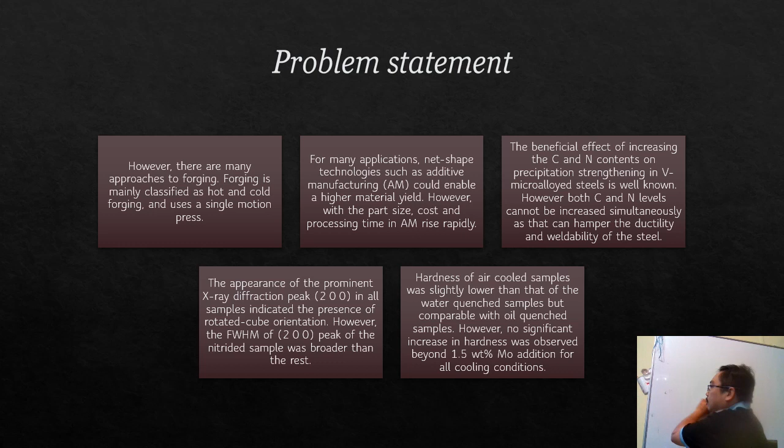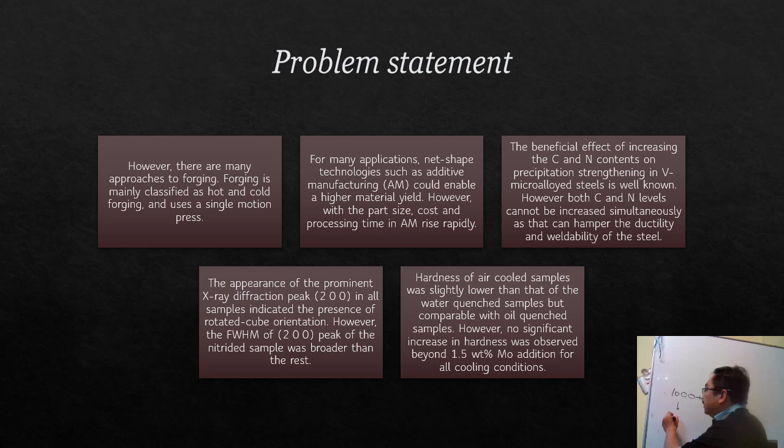Among the problems, people can study this approach to forging. Forging around 1,000 ton press. In normal operation for other countries that don't have this 80,000 ton machine, you can do forging. Forging also can reach nearly 1,000 ton press, 8,000 ton press is within the range of forging machine.

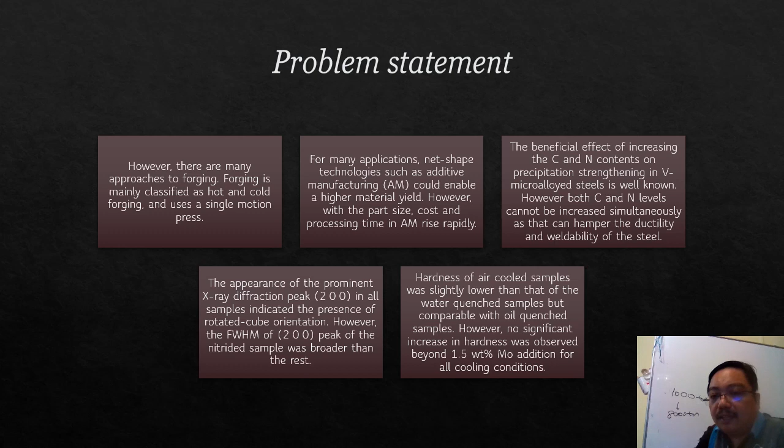Maybe some research want to, because the advantages: if you have a machine that can press very powerfully, very high level pressing, you can press any kind of material. So your material can become strong. Okay, this is the advantages. Okay.

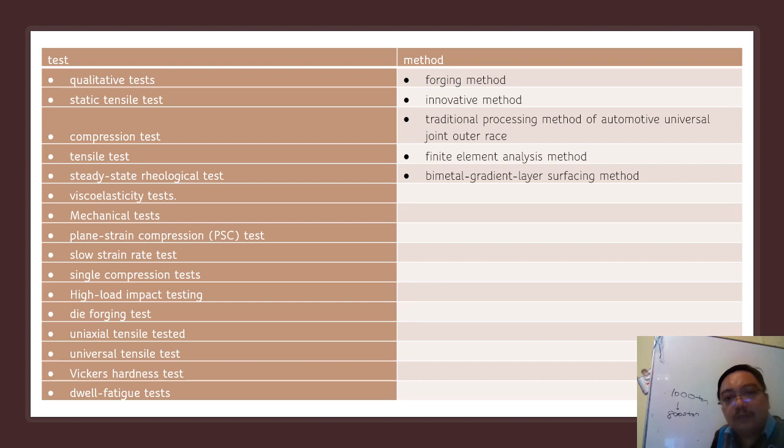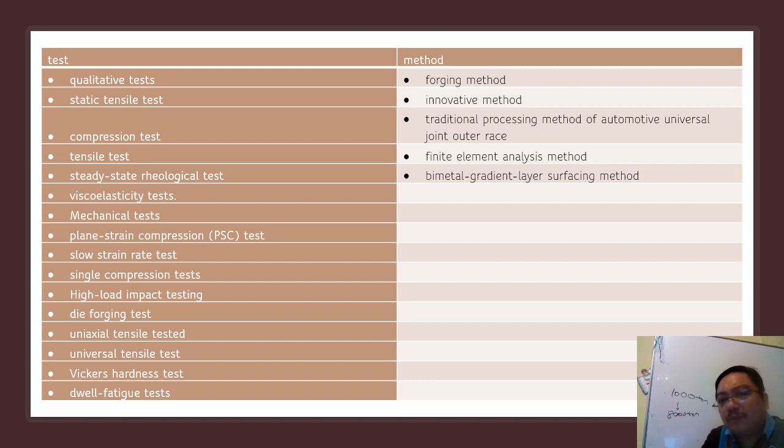So this is the research methodology. Okay, if you are interested in doing this research, this is among the tests that you may encounter, you may use. Maybe you will not use some of them, but most of them you may use. Discuss with your supervisor. Okay, they are the qualitative test, compression test, viscoelasticity test, mechanical test, forging test, uniaxial tensile test. This is a method, forging method, innovative method, traditional processing.

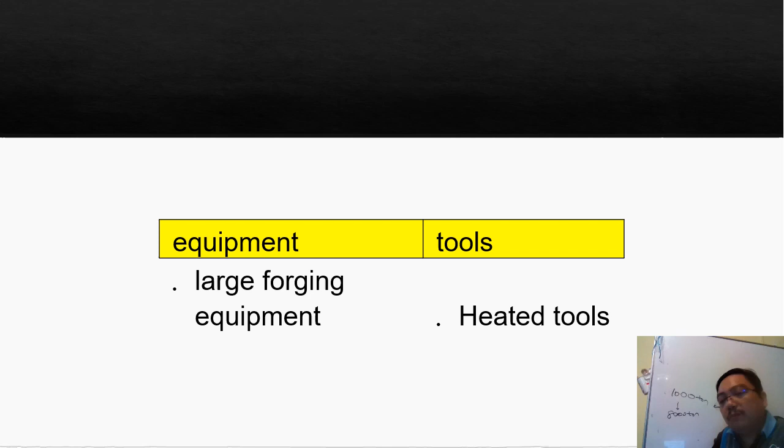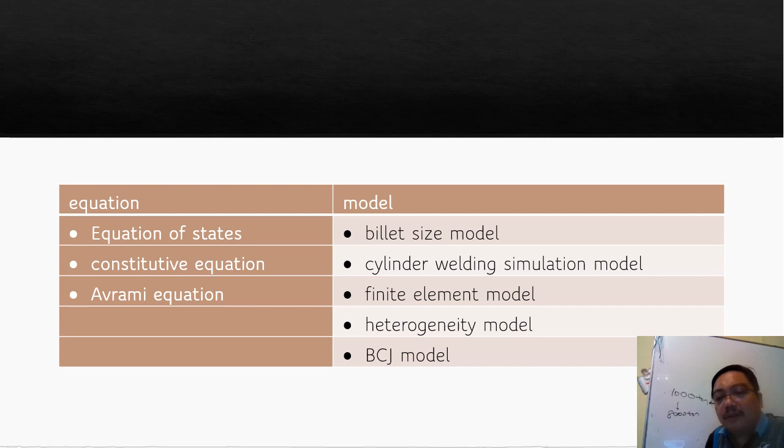equation of states, constitutive equation, Avrami equation, billet model, simulation model, finite element model, heterogeneity model, BCJ model. When you want to seriously go into this research, you must learn. You must learn by yourself what this equation, Avrami, billet model, and everything is. It will help you a lot. Okay, this is the properties that you may use, most of them.

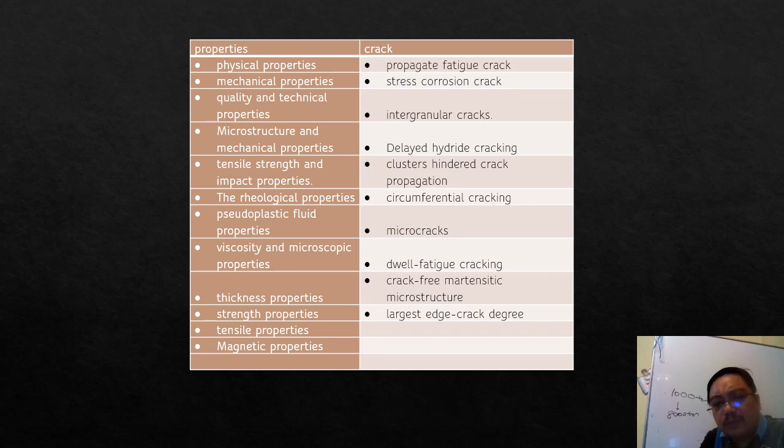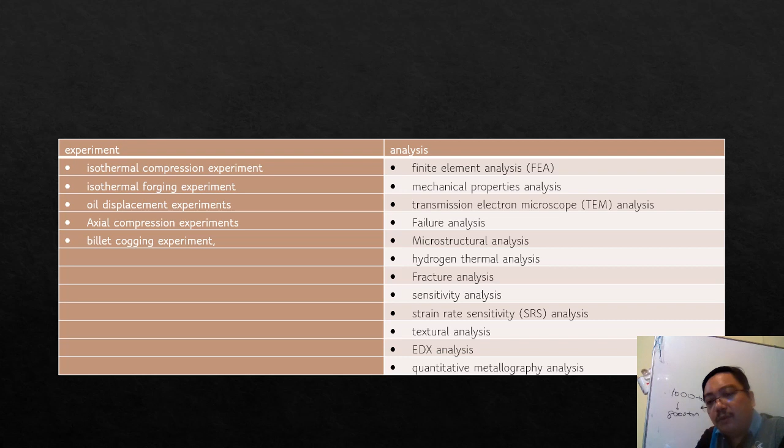Okay, this is the crack that may happen during the process: the micro crack, delayed hydride cracking, clusters hindered crack propagation. This is the microstructure test, viscosity, pseudoplastic properties. Okay, this is some of the experiments that you may use: isothermal forging, compression, oil displacement, axial compression. This among the analysis: finite element analysis, mechanical property analysis, transmission electron, failure analysis, microstructure analysis. So much analysis that you have to do. Okay, using this video, you may not miss most of the experiments.

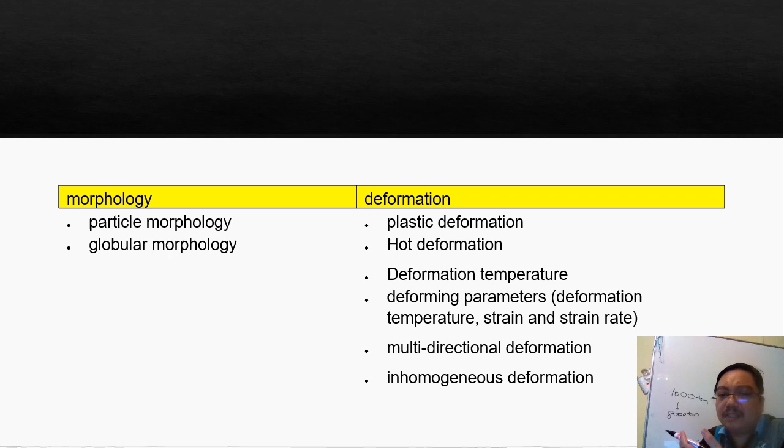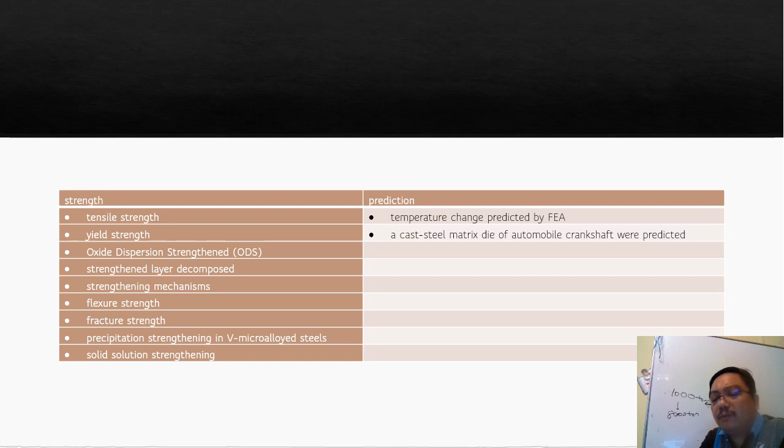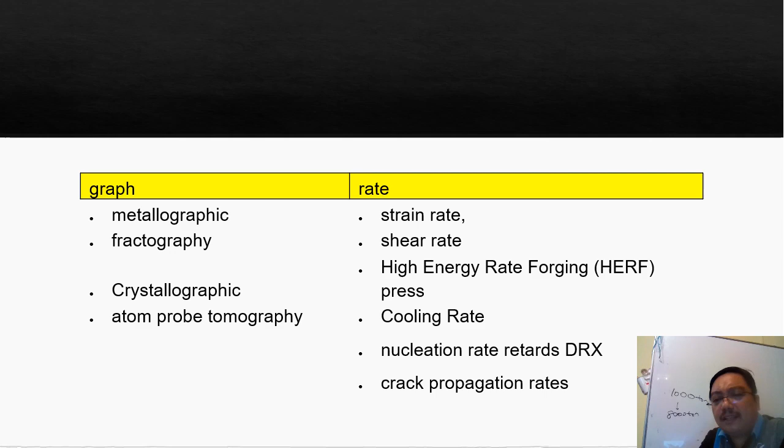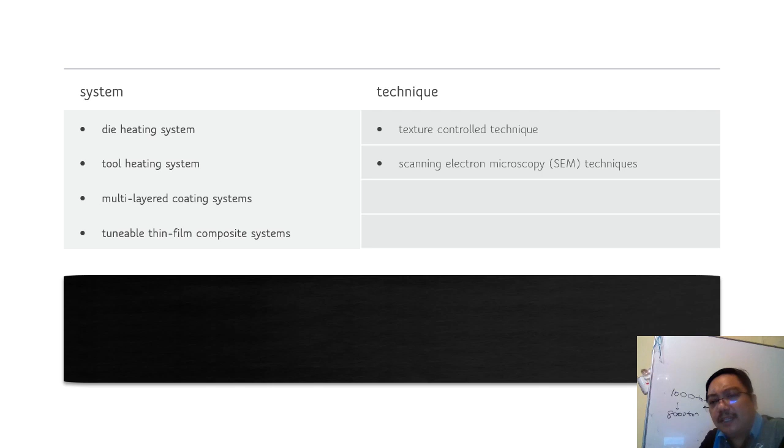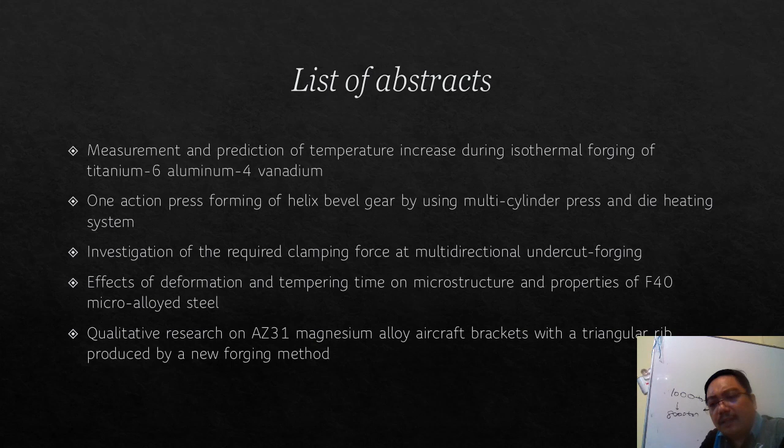Okay, so again, doing research is not that easy. It's also not that hard. As long as you know the technique to do this research, to do any kind of research, you may be successful. This video may help you a lot. Okay, I have done analysis. My student helped me to do this analysis. Just want to help you to do this analysis. You may not miss a thing because we have analyzed most of the content in the journal.

We have listed out the material, the equipment, the tools, the software. When you are doing this research, if you seriously want to do this research, you see this video, you may not miss any research material. Okay, your supervisor will be impressed.